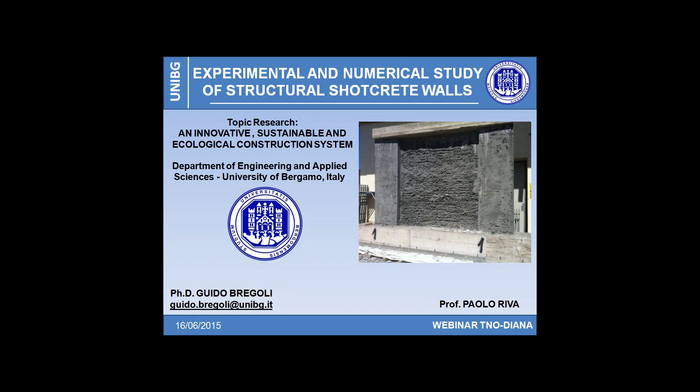The research was born with the aim of developing a simple construction method to realize sustainable residential buildings, especially social housing, and thus suitable for new emergent economies.

The main features we set out to achieve before starting were to realize a system characterized by high acoustic and thermal performance that provides for a considerable reduction, about 30%, in the carbon footprint of the construction system, with respect to a traditional building where the structure is made, for example, of traditional reinforced concrete with infill of hollow bricks.

Our system has to be suitable for different places and thus reliable also in high seismic areas. And finally, a system that could guarantee ease and construction speed and thus economic advantages.

So we have looked for a system that is very versatile and flexible, and adaptable in different contexts, both for social housing but also for buildings with high architectural quality, and as said, reliable for adoption in high seismic areas without any virtual limit to the number of stories.

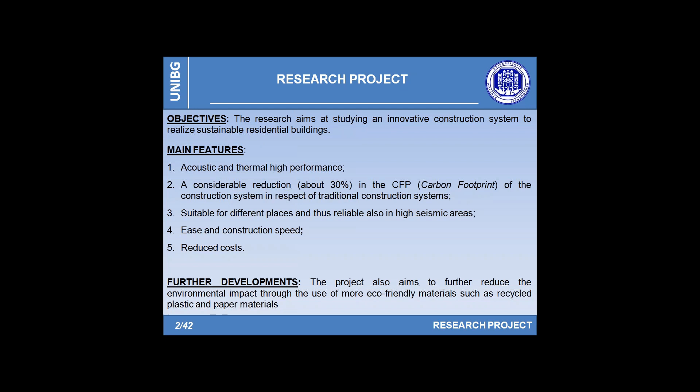The project globally took more than 2 years, and several experts of different scientific areas have been involved to reach these goals. The University of Bergamo, in particular, as a scientific partner, was responsible for studying the seismic structural behavior of the design system.

The University was also responsible for assessing the thermal performance and the energy charge of a typological building, for evaluating the economic and financial aspects, and for investigating the competitive positioning of the technological system in Italy and in developing countries. Along with University of Bergamo, private companies have also been involved.

As industrial partners, they faced 3 specific different topics. The first one was to design and develop the new constructive process, thinking about the structural layout, the wall layer, such as material, geometry, and so on.

Another fundamental topic was the development of a specific mix design to obtain a reliable shotcrete capable of replacing traditional concrete. And the last contribution was to study specific temporary works to optimize the executive process.

In conclusion, experimental analysis to assess the acoustic performance of the external walls and a study of the environmental sustainability by means of a carbon footprint analysis have been conducted.

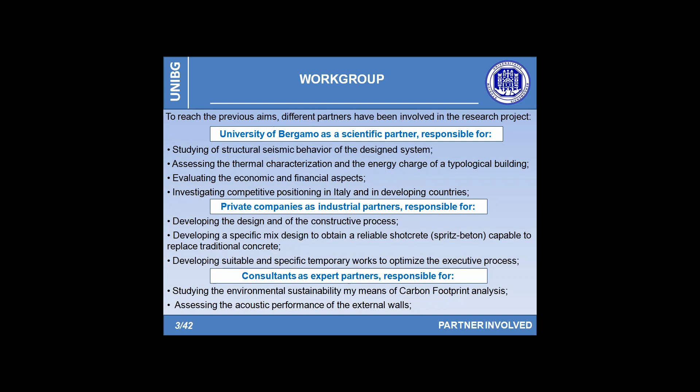Speaking about the presentation, it focuses on the possibility to accurately reproduce with the DIANA FEM code the structural response of a typical structure realized with the proposed system.

The presentation is composed of 4 parts. In the first one, an introduction to the research project is presented, focusing attention on the single module of the external wall. After that, in the second part, I quickly describe the experimental campaign carried out on 3 full-scale specimens.

In the third section, I show the choices and hypotheses assumed for the numerical analysis to reproduce the observed experimental behavior, highlighting the modeling assumptions and the proposed mesh. In conclusion, the numerical results compared with the experimental ones will be discussed.

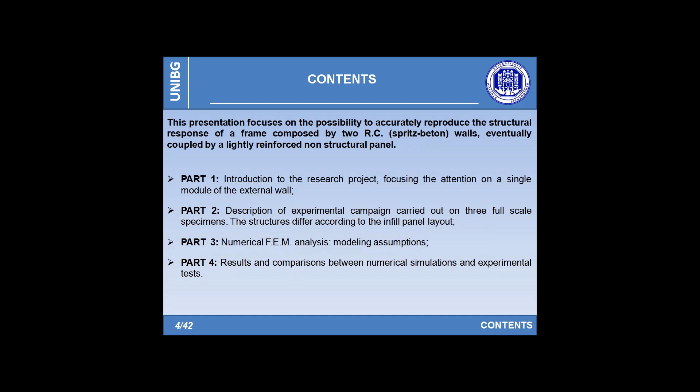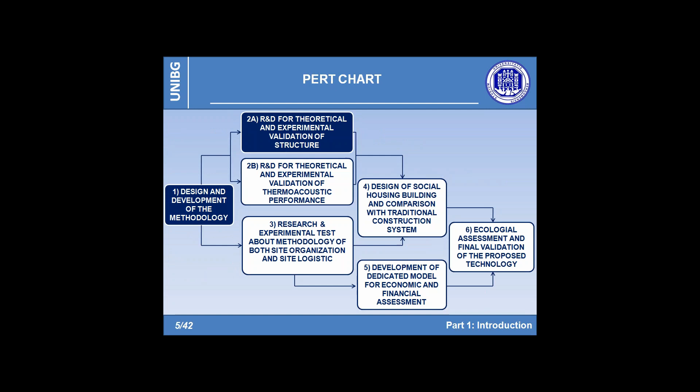In this slide is briefly illustrated the pert chart regarding the conceptual map that governs the work. I will tell you only about the first two boxes. The first one concerns the methodology, the design, while the second one relies on the research and development for the theoretical and experimental validation of the construction system.

As initially reported, the main innovation is related to a new way of using shotcrete. This kind of concrete is widely used in different applications. For example, we are used to seeing it in tunnel linings or for slope stabilization works. Another typical use is as a repair system for local intervention in a damaged structure. But in all these applications, shotcrete is not the main constitutive element for the structure, and it is used only as a layer of small thickness aimed at reinforcing a surface.

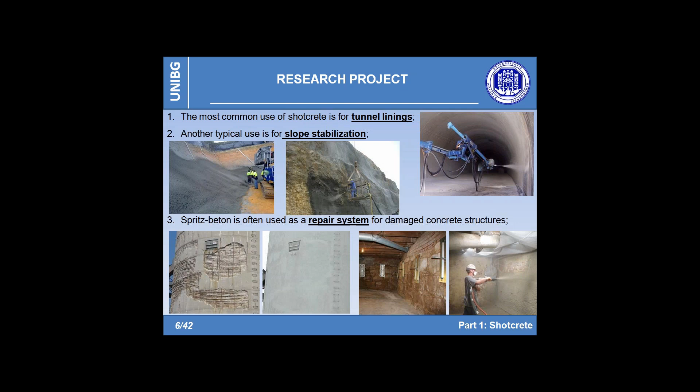Given that shotcrete can be proven to excellently adhere to a support, that it usually shows high mechanical strength, and that it results in a compact and homogeneous material, there are also many different systems that imply the use of shotcrete in structural applications to realize buildings.

It's important to note that in this system it is essential to ensure structural continuity between the individual modules by providing constructive measures such as the insertion of supplementary reinforcement or the overlapping of the wire meshes.

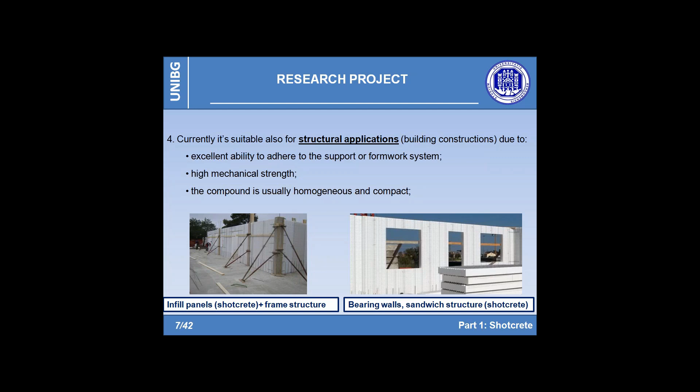In our proposed system, the bearing capacity instead is provided by seismic resistant structural elements made with spritz-beton, essentially small RC walls widely spread on the perimeter of the building. All the infill panels are also made using shotcrete, thus realizing continuous, lightly reinforced non-structural walls connecting the shear walls, which have approximately 4 to 6 meter spacing.

Differently from the previous system, the secondary elements do not fulfill any structural function and could be considered simple infill panels without a load-bearing role. Moreover, the proposed structure, being a traditional structural wall system, can be designed through a traditional approach, not requiring any kind of specific or special certifications.

The use of shear walls coupled with flat two-way reinforced concrete slabs leads to a simple overall structural system, which has the advantage of avoiding the complexity of the design and construction of seismic resistant frames, for example.

The construction phase of each floor starts by positioning the shoring necessary to cast the upper slab system. Then the EPS panels are fixed to the base floor and to the upper shorings through proper devices. The main innovation consists in the layout and composition of the external walls, as you can see in the figure.

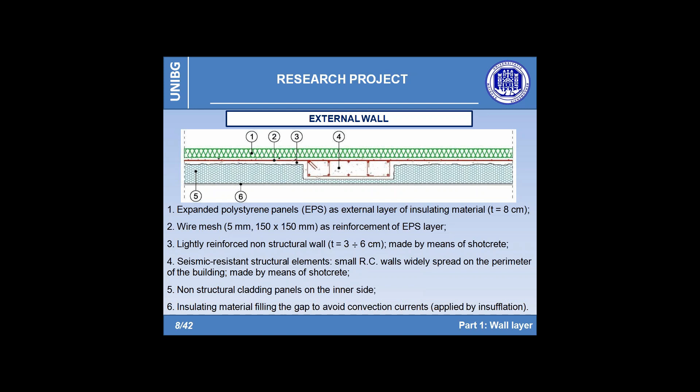After casting the shotcrete for the structural wall, and if applicable for a lightly reinforced non-structural panel, the wall section is finally completed by placing cladding panels on the inner side and filling the inner chamber with proper insulating material, thus improving the thermal and acoustic efficiency of the construction system.

To avoid uncertainties, a wet mix method has been adopted. It provides for the pumping of a pre-mixed cementitious composite, already mixed with water in a storage container before entering the nozzle. In this way, the worker cannot compromise the mechanical characteristics of the final product, not being involved in the control of water addition.

The mixture goes out through the nozzle thanks to compressed air, which permits the shooting onto the EPS panels without any additional operation. This results in a material whose mechanical properties are stable, replicable, and guaranteed.

On the contrary, in the dry mix method, the cementitious mixture is blown through a hose to the nozzle, where the operator should add water. As a result, the nozzleman should be very careful in choosing the right amount of water, avoiding compromising the mechanical characteristics of the final product.

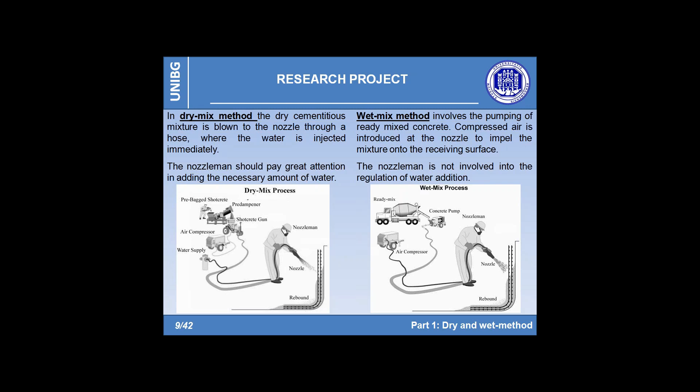In order to cast all of the components without traditional formworks, including the structural walls, while obtaining satisfactory and reliable structural properties for the concrete, a new fiber-reinforced shotcrete material has been developed to guarantee both workability and mechanical resistance, and to allow good cohesion between concrete and vertical supports.

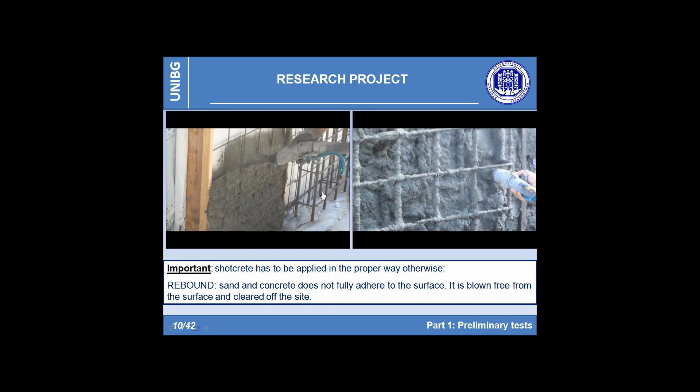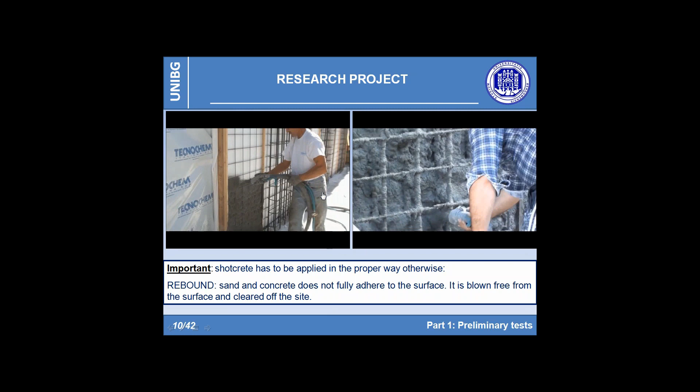In this slide, the shooting phase during the preliminary test is shown. On the left side, one can see the material applied in correspondence with the infill. On the right side, a structural wall is cast. This is only a first attempt, but the preliminary results gave us important information for the continuation of the research.

First of all, the worker has to pay attention to correctly regulate the amount of compressed air flow. Otherwise, the impact forces become too high, and this can result in deflection or vibration of the support, which can also cause rebound and thus wastage of material.

This test, in particular, relies on assessing the feasibility of the process, initially monitoring the capacity of the cementitious compound to adhere to the supports and to show limited rebound.

Considering that in this application the supporting surfaces acting as formworks are not stiff and don't have high inertial masses, they may be subjected to non-negligible vibration. In order to guarantee adequate stiffness, it's very important to correctly choose the thickness of the EPS panels and especially the spacing of the stiffeners used to stabilize them during shotcreting.

In this case, neither delamination between support and shotcrete nor sliding between two consecutive layers of shotcrete occurred. This is due firstly to the mechanical characteristics of the developed cementitious compound, which is homogeneous and sufficiently compact, with very good strength capacity.

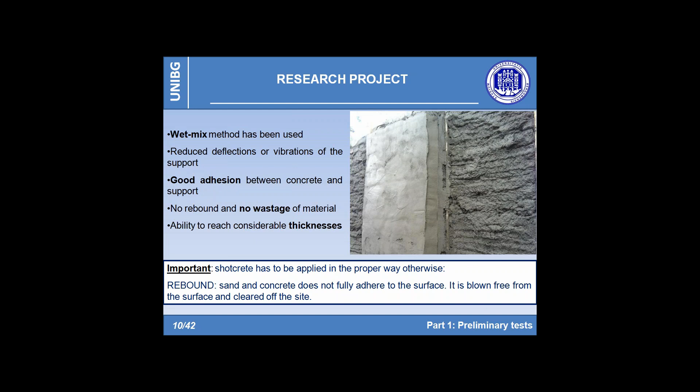Moreover, the success of the preliminary test has also been reached thanks to the efficiency of the selected EPS panels, both in terms of roughness and number of panel stiffeners. All these features have permitted obtaining a considerable thickness, in particular more than 20 centimeters, without wastage of material, permitting progress with the experimental campaign.

After assessing the reliability of different cementitious materials in terms of stability and absence of sliding phenomena, uniaxial compressive tests on several cores extracted from the structural wall have been carried out and a maturation curve has been defined.

Two different types of cementitious material have been tested during the preliminary test. The first one, named Mix 1, appeared to be homogeneous in terms of mass density and reliable in terms of structural response, reaching a mean compressive strength after 28 days of curing equal to 50 megapascals, and especially showing an average strength at 24 hours equal to 25 megapascals, thus ensuring the possibility of erecting the structure with an extremely fast construction process.

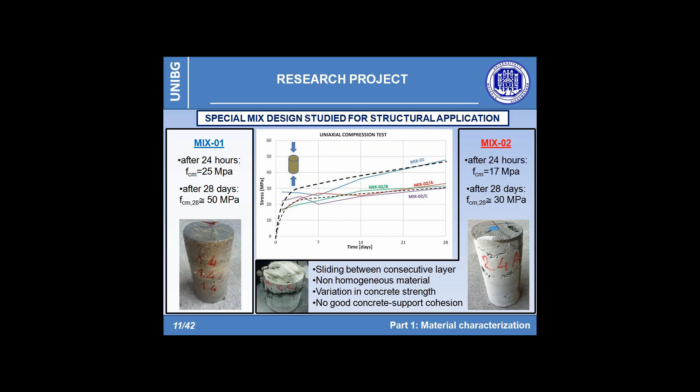Concerning Mix 2, different problems regarding sliding between two consecutive shotcrete layers and detaching from the support suggested modifying the mix during the casting phase by adding different types of plastic fibers. Nevertheless, the test results haven't proven to be up to expectations, thus suggesting adopting Mix 1 to proceed with the experimental campaign.

To evaluate the seismic response of the proposed technology, a typical structural layout was designed with the proposed system, as shown in the upper figures. The plans represent a model story of a 5-story sample building, specifically designed to investigate also the environmental impact in terms of equivalent CO2 and thermal performance. The project also permits deriving a geometrical model representative of the real structure.

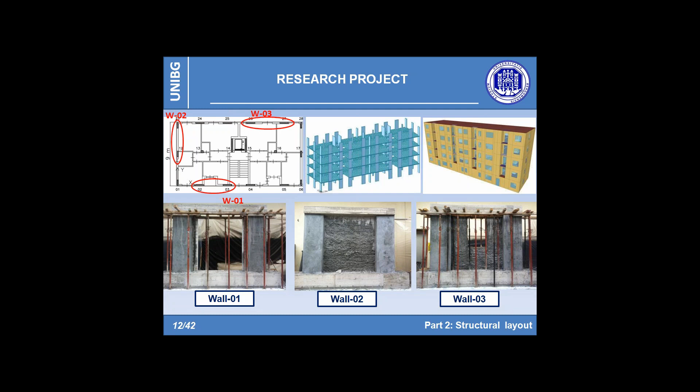In particular, 3 different specimens were taken from the external envelope of the building, as reported in the slide. This is to study the hysteretic response of the designed structure and to investigate the interaction between infill and structural shear walls. The specimens have the same dimensions and differ only in respect to the presence of a light infill panel that can also present an internal window opening, as depicted in the slide.

So each sample was made of an outer frame having an overall dimension equal to 4 by 2.88 meters, composed of 2 external structural walls of equal size, 80 by 20 centimeters, connected at the top by a beam simulating the top floor slab, and at the bottom to a rigid foundation.

The specimens wall 2 and wall 3 differ from the first specimen by the presence of a shotcrete infill panel, having a variable thickness between 3 and 6 centimeters.

The specimen, being a typical portion of the external building envelope, is only constituted by the EPS panels and by the shotcrete layer.

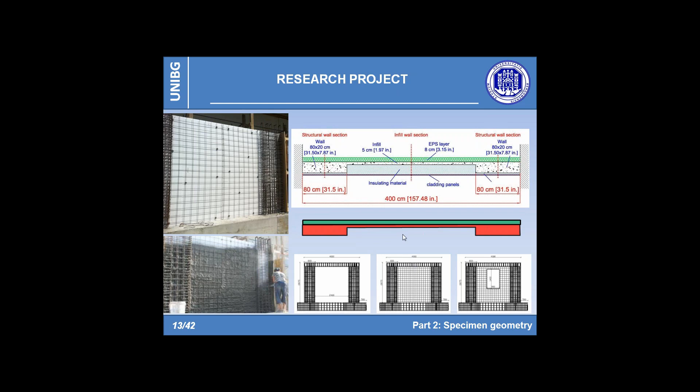So, 3 pseudostatic cyclic tests have been conducted on the previous full-scale specimen. The experimental tests have been performed imposing a displacement to the top beam by means of an electromechanical actuator connected to a rigid wall used as a reaction structure.

To ensure that the wall deforms, avoiding lateral instability or out-of-plane displacements, a retaining system composed of 4 steel struts has been set up to guide the specimen during the load application. Letter C in the image.

The rigid foundation has also been pre-stressed to prevent any possible slip phenomenon, and moreover it has been tied to the reaction floor close to the external sections, exerting a vertical confinement that inhibits its rotation and then its lifting.

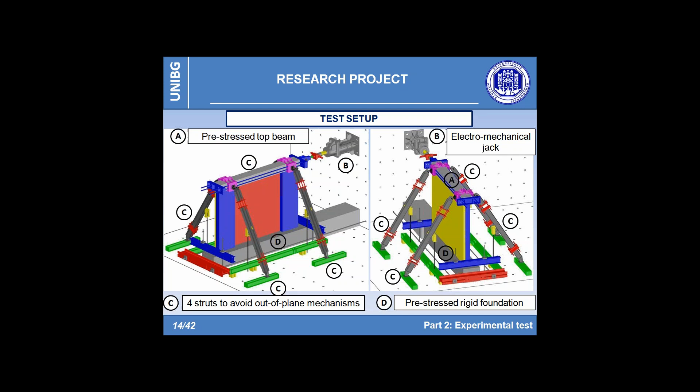All tests have been carried out by applying a cyclic displacement of increasing amplitude to the top beam according to the loading history shown in the table and depicted in the figure.

The first level of the imposed drift, equal to 0.1%, is functional only to verify the elastic stiffness of the structure. After that, the loading history provides the execution of drift levels multiple of 0.25% until reaching the imposed drift coinciding with 1% of the story height.

From this step forward, the amplitude of the cycles is incremented each time by a value equal to 0.5%, up to the collapse of the structure. In particular, for each drift level, 3 complete cycles have been repeated.

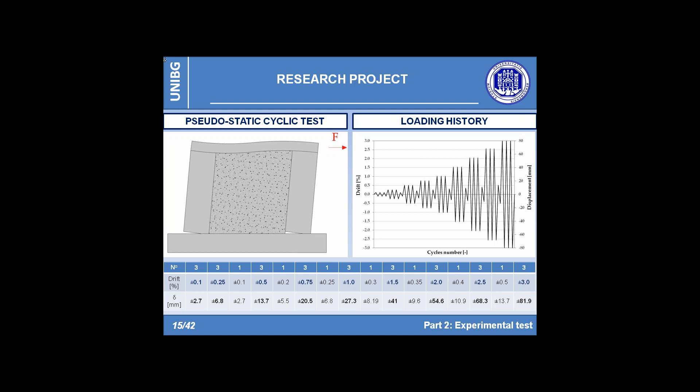As briefly outlined, the adopted protocol has been performed by monitoring the displacement in terms of interstory drift. The horizontal displacement has been registered at the top, in the middle of the upper beam, by the instruments named 2 and 27, while the height of the structure has been assumed as the distance between the point of the applied load, labeled 1 in the picture, and the base of the structural walls, in this case equal to 2.73 meters.

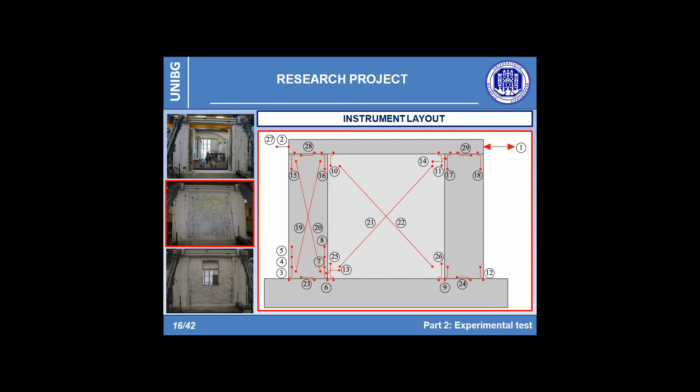The displacement, crack openings, and other kinematic quantities have been recorded during the test by means of a potentiometric transducer, according to the layout shown in the figure. In particular, the devices located at the interface between the shear walls and foundation, and between the structural walls and the upper beam, have permitted monitoring of the respective sliding, giving important information also for the numerical modeling.

In this picture, the last regarding the experimental campaign, the specimen geometry and the reinforcement details are shown. As you can see, the spacing of the bars and of the stirrups is very repetitive, highlighting a regular layout.

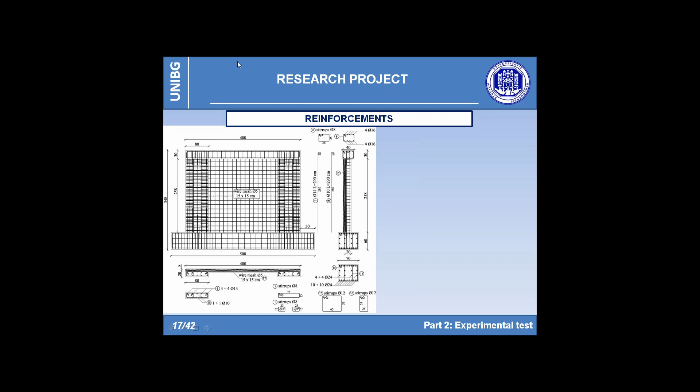In particular, you see here the reinforcement designed for the upper beam, the one related to the structural walls, and the infill panels, armed only with a light 15 centimeter wire mesh with a diameter of 5 millimeters.

Finally, the foundation has been designed to be over-resistant, and for this reason it was strongly armed to behave elastically. It's also important to note that sheets of electrowelded wire mesh are only placed side by side.

In this way, the infill results attached to the remaining structure thanks to the wire mesh that goes on only over the structural walls. This layout has been responsible for the mechanism affecting the infill observed during the test.

In fact, in correspondence with the shrinkage crack developed in the middle of the infill panel, the central panel tends to divide into two halves.

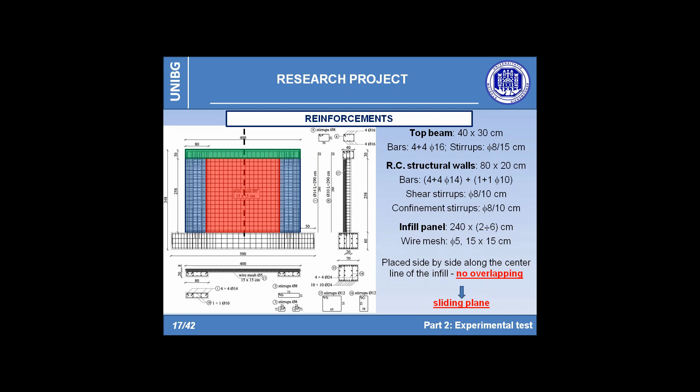The numerical analyses have been validated in terms of capacity curve, such as base shear versus interstory drift or displacement, and by comparing the experimental crack pattern with that obtained numerically, trying to simulate and investigate the interaction between infill and structural shear walls. All the tests have been described with a two-dimensional model using only plane stress elements.

The numerical simulation takes into account only the material nonlinearity by means of a smeared crack approach, while the geometric ones have been neglected. Moreover, for the sake of simplicity, only monotonic pushover analyses have been performed, reducing the computational cost to about 4 to 6 hours.

In this way, the damage accumulation due to the cyclic actions has been ignored. Not having a specific characterization of the material except for the mean compressive strength, the problem has been studied from an engineering point of view, trying to reproduce the main mechanism observed during the test. In this way, it doesn't represent the validation of the specific material mechanical behavior.

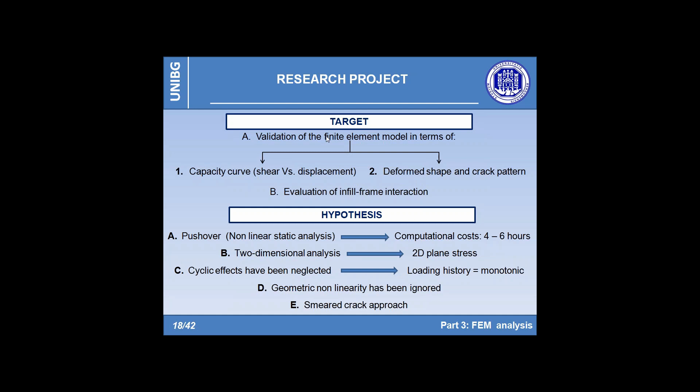The proposed numerical simulations are performed by means of two-dimensional models where all geometrical parts are meshed using 8-node quadrilateral plane stress elements. The mesh is highly structured, regular, with square elements having side equal to 50 millimeters. Only for the last test, Wall 3, in order to smooth the edges of the window, 6-node triangular plane stress elements have been used, placed at the corners of the window to avoid numerical problems due to high stress localization.

Moreover, trying to reproduce the interaction between the parts making up the specimen, interface elements having zero thickness have been adopted.

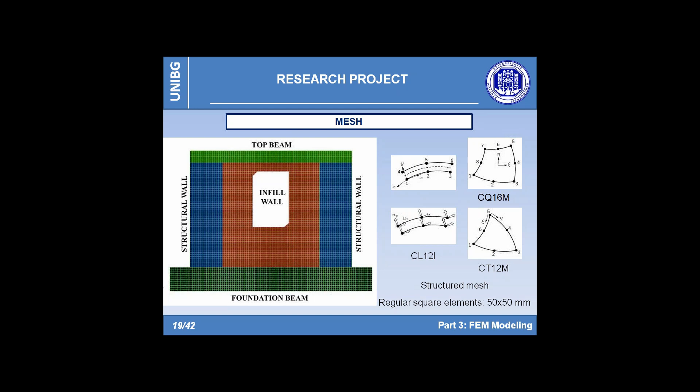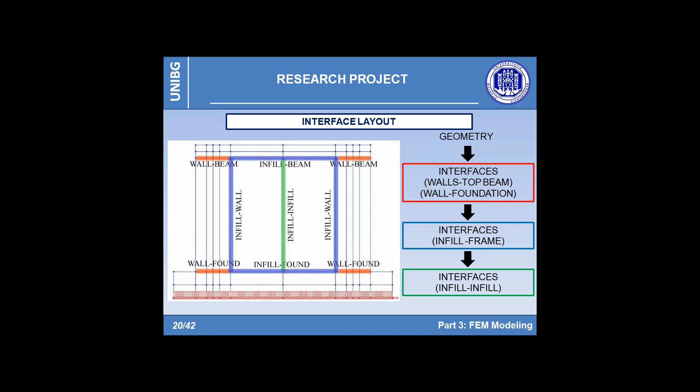Regarding the modeling of the reinforcement, as previously briefly described, all the horizontal and vertical steel elements having a regular spacing have been modeled as reinforcement grids. Thus, the reinforcement has been modeled as fully embedded in the concrete elements, implying a perfect bond between the reinforcement and the surrounding material.

Firstly, it's necessary to define the area of the mother elements, and in particular the following zones have been detected: the beam reinforcement, the foundation reinforcement, the area related to the longitudinal bars of the confined zone inside the structural walls, and in the same way the one connected to the stirrups.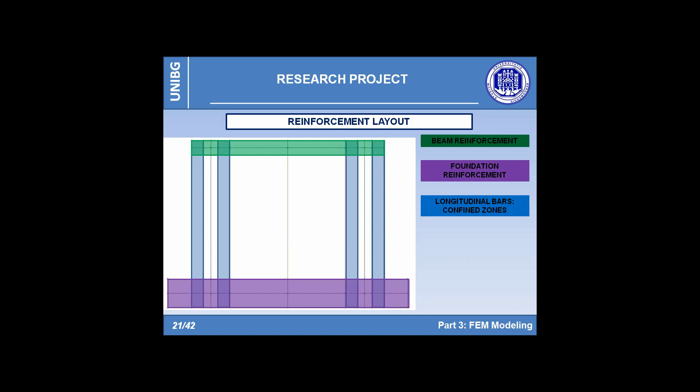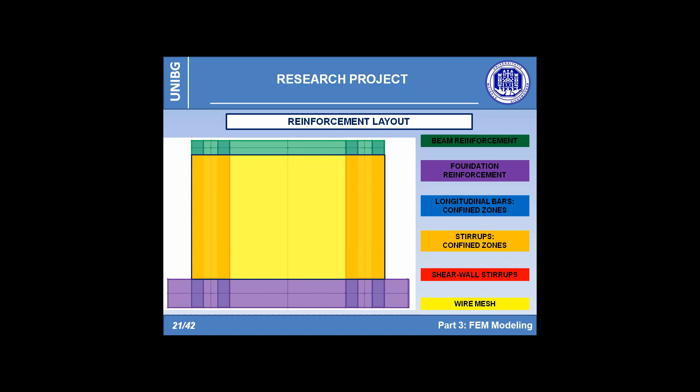After that, the areas for the shear-wall stirrups and for the wire mesh have been created. Secondly, for each of the latter areas, an equivalent thickness for both global directions has been defined.

Only as an example, to calibrate the geometrical property of the wire mesh, it's only necessary to divide the area of the bar cross-section by the wire mesh spacing.

So, being 20 square millimeters the area of the cross-section of a single bar and 150 millimeters the wire mesh spacing, the equivalent thickness results identical in X and Y direction and equal to 0.131 millimeters.

In the same way, knowing the percentage of longitudinal reinforcement, it's enough to multiply the latter by the host element thickness. For example, being 1.64% the reinforcement percentage of the confinement zone, the Y equivalent thickness results equal to 2.463 millimeters. So, following this example, the X and Y equivalent thickness have been calculated for all the previous areas.

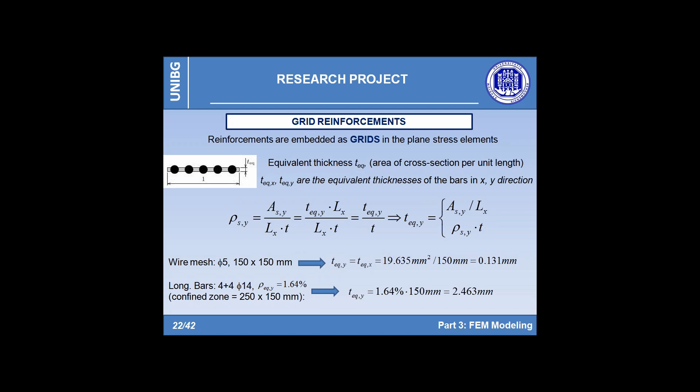In this slide, the different materials implemented in the model are presented. In particular, 3 distinct types of concrete have been defined: the traditional concrete used in the top beam, the shotcrete used in the structural walls and in the infill, and finally the ordinary concrete used in the foundation.

In particular, acting as a rigid base, the foundation has been modeled as an elastic element, ignoring material nonlinearities.

Nonlinear property in tension using a total strain rotating crack model has been defined both for the sprayed concrete and for the top beam concrete, on the basis of the linear softening tension stress-strain relation, for which it is necessary to specify only the ultimate tensile strength and strain.

Regarding the compressive behavior for the fiber-reinforced sprayed concrete, the parabolic diagram stress-strain model was used. In this case, the data input corresponds to the ultimate stress and to the compressive fracture energy.

To describe the compressive behavior of the ordinary concrete, instead, the Thorenfeldt model has been chosen, defining only the maximum compression stress.

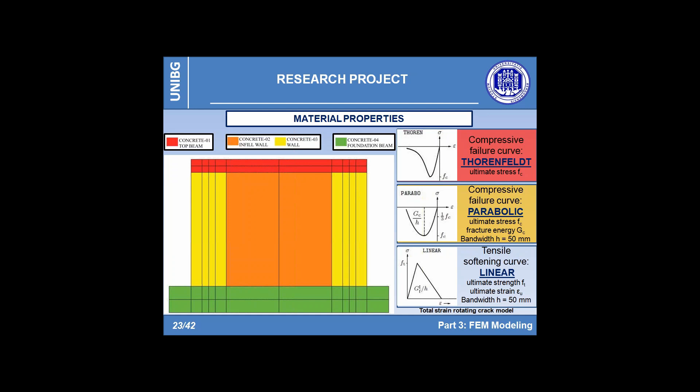Finally, given the fact that the infill panel isn't homogeneous in thickness and density, the related material has been modeled, strongly decreasing the mechanical property of the structural wall shotcrete, as shown in the next slide.

Both for the traditional concrete used for the top beam and for the shotcrete, a Young's modulus equal to 20,000 megapascal has been adopted. Even if this value is lower with respect to the one suggested by the code for high-strength concrete as the present shotcrete, it is worth remembering that, being shot and not cast, the actual cementitious material can be treated more as traditional concrete, given that the voids occurring during the shooting phase can also affect its stiffness.

For the same reason, the ultimate tensile strength and strain have been hypothesized to obtain a tensile fracture energy more similar to that of traditional plain concrete.

Moreover, concerning the behavior in compression, the value of the fracture energy is very difficult to calibrate, affecting in a very strong way the ductility capacity offered by the structure. Despite that, it results that values between 10 and 50 kilojoules per square meter can be suitable to describe the experimental results.

Regarding the ultimate compressive strength, the values listed in the table are coherent with uniaxial compression tests performed on all the above materials, resulting in an average ultimate strength respectively equal to 50 megapascal for shotcrete, 15 megapascal for the top beam, and 30 megapascal for the foundation.

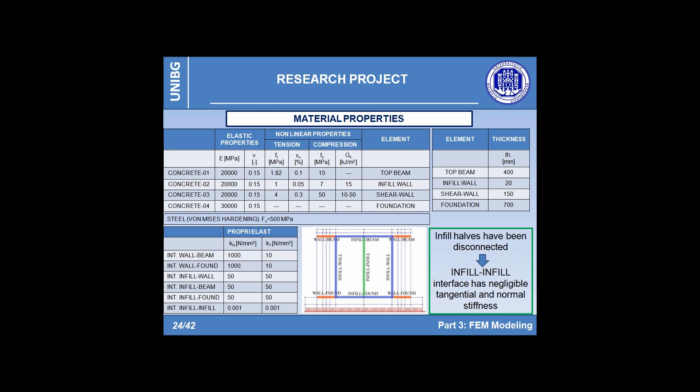This is the last slide regarding the finite element model, showing the applied load and the boundary conditions. All the simulations have been performed applying a displacement of 1 millimeter amplitude to the center point of the top beam. Then a pushover analysis up to 60 steps has been carried out using both displacement and force control, with a tolerance of 1% for both parameters.

To properly simulate the load condition, the displacement has been applied at the top, connecting through a rigid link all the nodes belonging to the horizontal axis of the upper beam. This solution constrains only the horizontal global displacement along the x-axis, causing the top beam to move rigidly and allowing for a better distribution of the external load, thus avoiding a possible numerical problem due to the localization of high stresses in only a few nodes.

Finally, regarding the boundary condition, the nodes belonging to the baseline of the foundation are simply constrained by means of hinges that inhibit both horizontal and vertical displacement, coherently with the experimental setup.

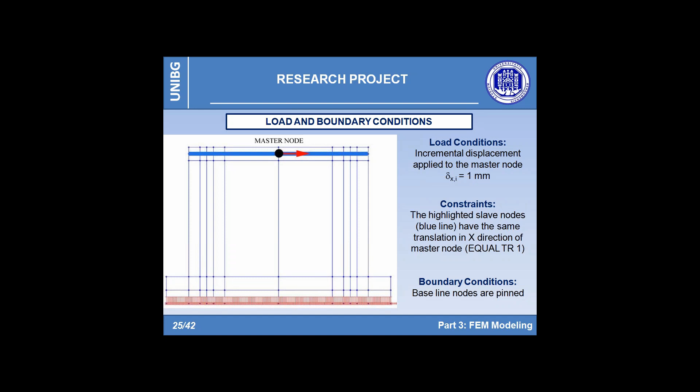For each of the three tests, the comparison in terms of load-displacement curves is presented, and in particular, in the next slide, the black line reports the envelope curve derived from the experimental cyclic loading. As previously said, the numerical simulation is only monotonic, so in red is the capacity curve, equal for both directions given the symmetry of the specimen.

These figures show first how for wall 1 the numerical result exhibits a good match in terms of elastic stiffness. The model seems to be also able to correctly catch the peak load, in particular 282 kN and 264 kN for the experimental test and 279 for the numerical one.

The main differences are recorded in respect to the negative direction, but this evidence is only due to the cyclic effects. In effect, as you can see for each step of displacement, the experimental forces in positive direction are higher than the equivalent in the opposite side. This behavior is consistent with the Bauschinger effect that implies a reduction of the yield strength, inverting the verse of the imposed displacement.

Regarding the softening branch, after the peak load, a key role is played by the parameter of the compressive fracture energy that affects the ductility level provided by the structure. In this case, a value of 50 kJ per square meter has proven to be reliable.

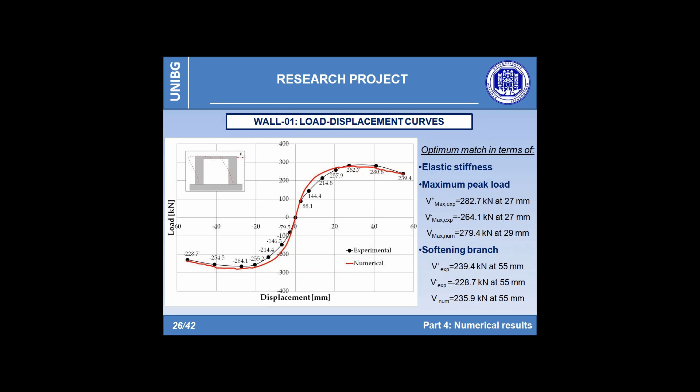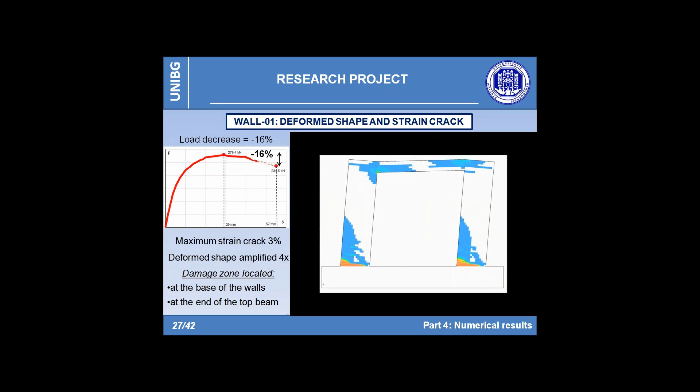The crack pattern observed for wall 1 is highly symmetric, with ample cracking zones which affect the bases of both structural walls, and with the formation of plastic hinges at the ends of the top beam. In this way, once the structure reaches its ultimate bearing capacity, it can be noted that the top beam is able to guarantee a coupling action between the walls.

From this figure, you can see as the numerical simulation is able to describe the main structural mechanism, highlighting with good reliability the cracks that affect the structural walls at their base and that have been also responsible of the structural collapse occurred at 2.5% drift.

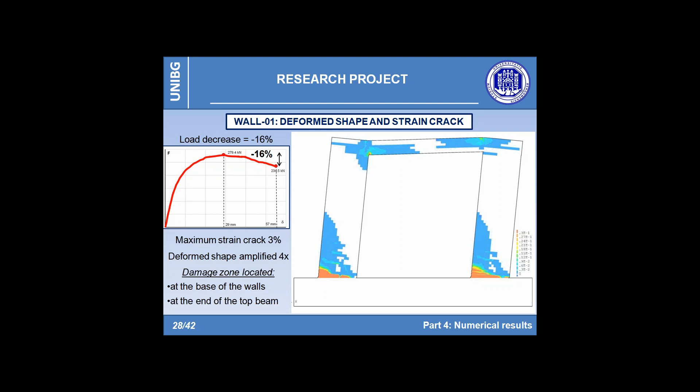Trying to compare the crack layout observed during the test with that provided by the numerical analysis, in this slide the cracks appear during the application of the load only in positive direction, and in negative direction have been distinguished.

In particular, in the left image, the load is applied in positive direction, from right to left, as also deducible watching the orientation and localization of the cracks. On the contrary, the picture on the right side shows what has happened during the application of the displacement in the negative direction. The picture highlights the superimposition between the experimental crack, black lines, and the cracked area caught numerically.

As you can see, the model has proven to be reliable in reproducing the experimental behavior, also catching the inclination and evolution of the cracks. Both at the base and in correspondence of the upper beam, the crack zones caught numerically are a little underestimated, probably due to the cyclic effect that increases the damage level at each step and that here are not taken into account.

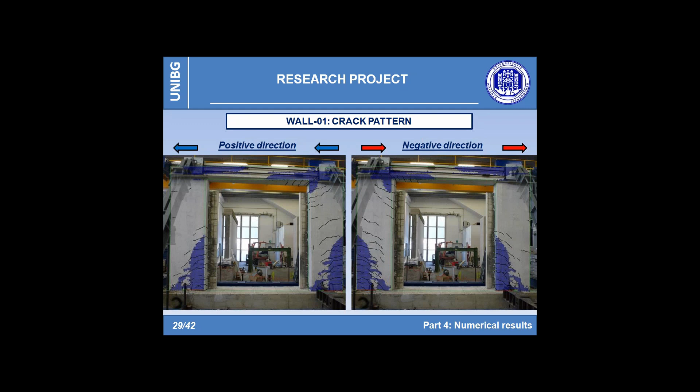The present slide, where details of the main cracks observed during the test are shown, confirms how the finite element model is able to reproduce the actual damage. In particular, in the figure, you can see the detachment at the interface between shear walls and the foundation, and also the flexural cracks at the base that have been responsible of the collapse of the structure.

Both the shear walls have experimented a similar damage pattern that involves about half of the height of the wall, as shown in image A and B. Finally, observing the lower side of the beam, it is possible to recognize the horizontal cracks that signal the formation of a plastic hinge at the end of the top beam, as seen later in the figure.

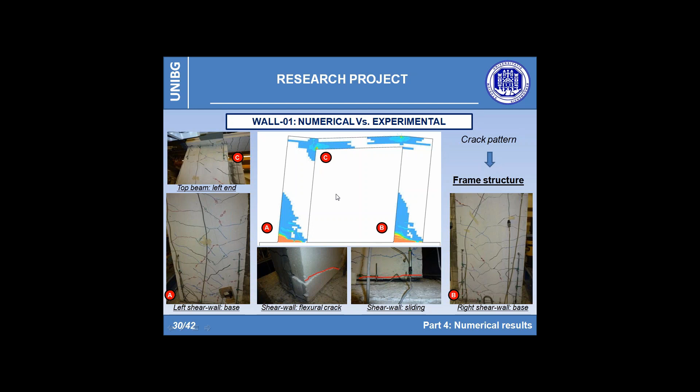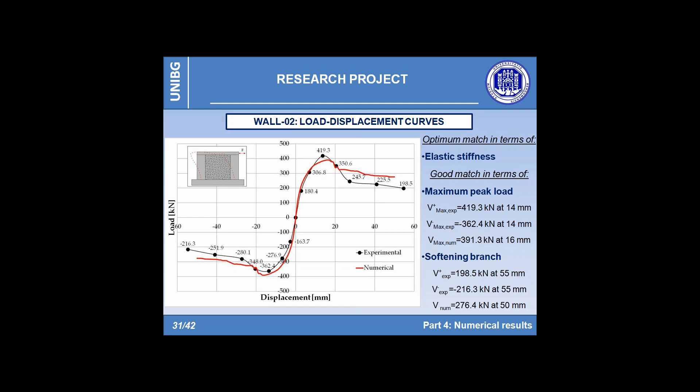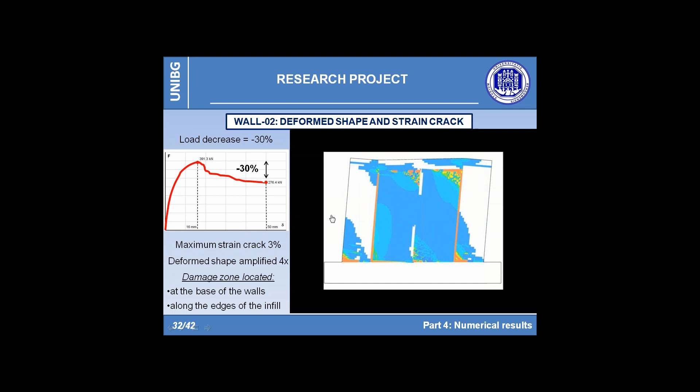As previously done, the video of the deformed shape evolution with increasing applied displacement is reported, highlighting the zone affected by cracks. It can be noted how the infill panel tends to quickly exhaust its structural resources, highlighting, starting from 0.5% drift, widespread damage and significant cracks at the interface with the structural walls and along the edges with the outer frame.

Observing the figure, it can be seen how at the base the cracked area is extending in height due to the presence of an inclined strut that develops within the infill.

Regarding the outer frame, a crack pattern non dissimilar from the previous one can be recognized, except for the damage zone affecting the right shear wall due to the contribution of the compressive struts.

The infill panel presents a crack pattern that appears similar between the two halves. This is due to the presence of the elastic interface with no stiffness model along the center line, which permits the two substructures to behave as independent parts.

Moreover, it can be seen how once the central panel becomes inactive, most of the externally imposed loading action affects only the structures composing the frame.

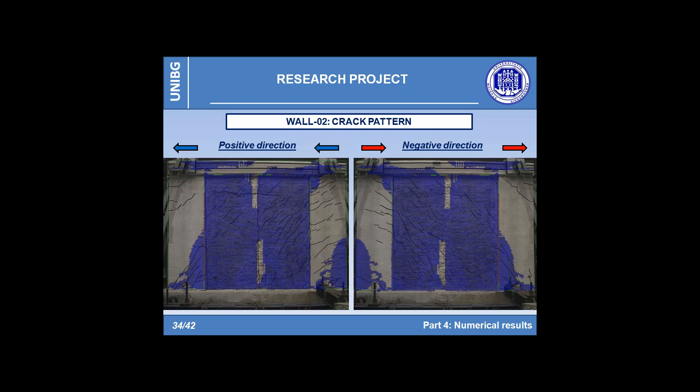Also in this case, the extension of the damage zone numerically is underestimated, but the result can be considered quite satisfactory, given the difficulty to properly describe the interaction between the outer frame and the infill.

Sorry Guido, it seems there is a connection problem. Your voice is not really clear. Just to make sure that there is nothing over there affecting your presentation. Thank you, I'm sorry, okay, I'll try to be closer to the laptop. Thank you, okay.

Yes, also in this case, the finite element model has proven to be able to catch the main mechanism observed during the test, especially correctly assessing the contribution in terms of bearing capacity offered by the infill.

The choice to model the initial shrinkage crack as a plane of weakness revealed to be efficient in reproducing the interaction between infill and structure.

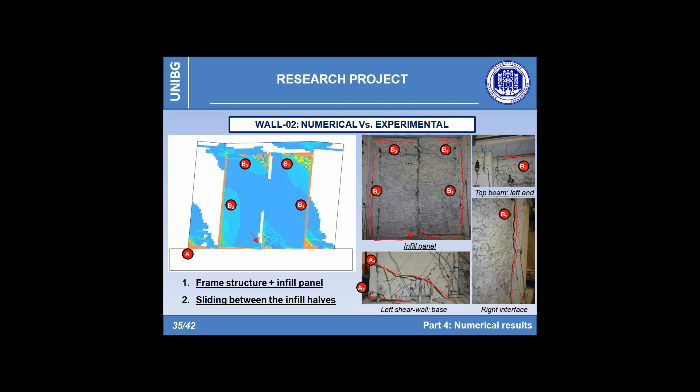Finally, the last comparison in terms of load displacement curve is presented concerning wall 3. The numerical predictions are in substantial agreement with the experimental evidence, both in terms of initial stiffness and peak load.

The maximum force obtained for 0.65% drift is equal to 371 kN, respectively 2.3% and 13.5% higher than the experimental values, registered as usual at 0.5% drift.

The trend of the softening branch is representative of the real structural behavior. However, it's interesting to note that the slopes of the two degrading post-peak branches tend to slightly diverge.

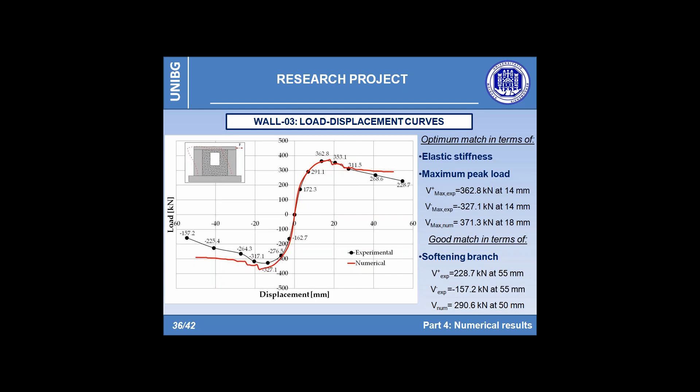The reason for this trend may be related to the greater damage suffered by the structural walls due to the stiffening effect exerted by the infill portion coinciding with the spandrel under the window. This configuration tends to reduce the slenderness of the walls and thereby induces high shear stresses.

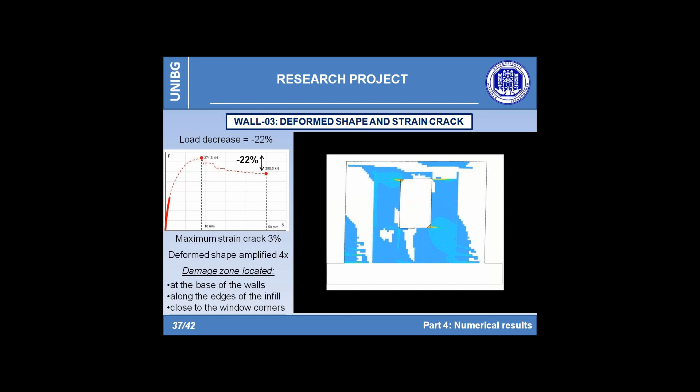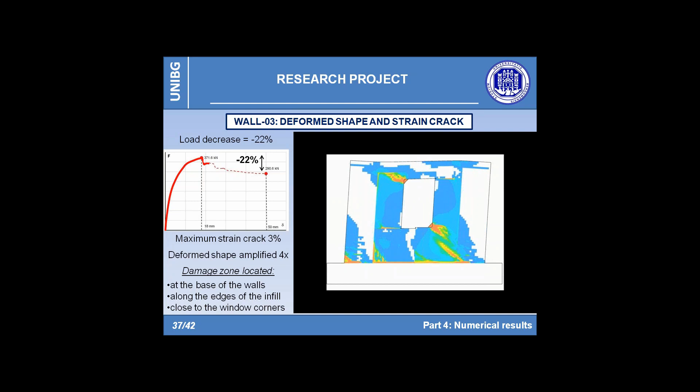Coherently with what was done for the previous test, the evolution of the damage zone in terms of crack strain is reported, being in red the areas affected by strain higher than 3%. The deformation shape in this case is also amplified four times.

The crack evolution reveals that from 0.65% drift, the infill panel is entirely damaged, and that the layout of the cracks appears stable and uniquely defined.

The numerical model revealed to be extremely accurate, turning out to be able to capture both the sliding mechanism that occurs between the two infill halves and the main damage. As also reported in the figure, the widest cracks develop from the corners of the window along the construction joints and between the infill and the walls.

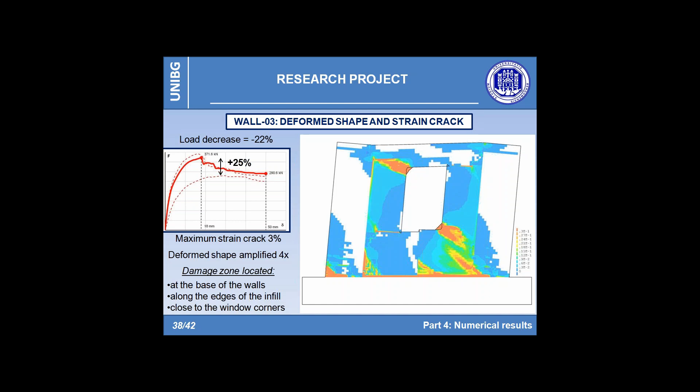Contextually, the outer frame presents a crack pattern very similar to the one related to the first two walls. The result of a superimposition between numerical prediction and experimental cracks, in the hypothesis of a monotonic action, confirms the potentiality of the proposed model to describe the main mechanism, highlighting at the same time the drawbacks previously mentioned.

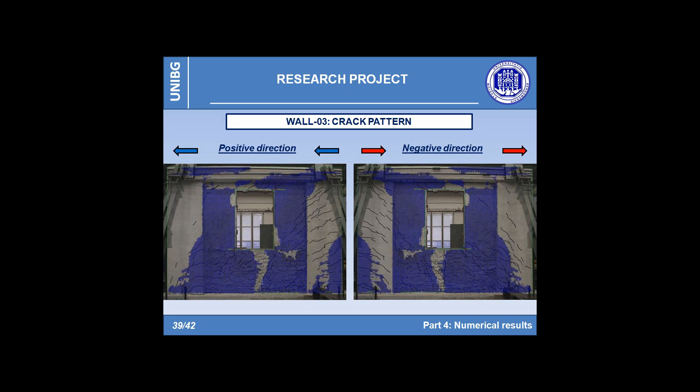Also in this case, the shear walls are affected by more extensive damage compared to what's recalled by the finite element analysis. With respect to wall 2, the shear walls seem to be affected by cracks along their entire height, confirming that the presence of the inferior spandrel slightly affects the crack pattern of the structural walls due to high shear stress, as in a short column effect.

Despite it, the last slide shows without any doubt the efficiency of the proposed modeling, comparing the distribution of the cracks, of the strain crack, with an image of how wall 3 looks at the end of the test. The similarities are very interesting.

First, with letter A, we can recognize the cracks starting at the base of the shear wall close to the foundation. In the same way, letter B highlights the damage involving the right wall, where the cracks appear to be less pronounced, probably due to the action exerted by the compressive strut.

As usual, close to the opposite corner of the window, letters C and D, important damage areas can be recognized, also clearly highlighted in the experimental view. Finally, also in this case, the sliding movement between the infill halves is correctly modeled, as shown in the upper image, where a detail of the window is reported.

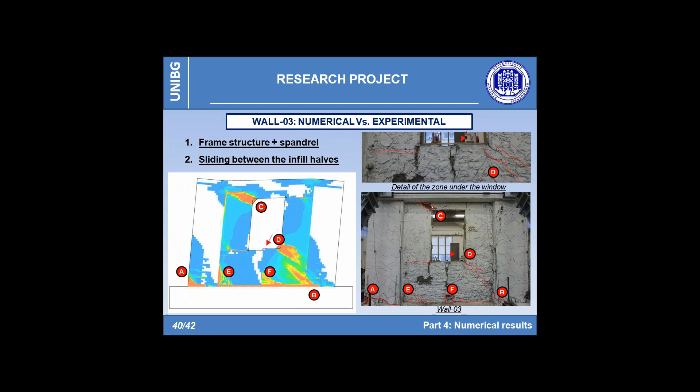The experimental results have shown that the presence of an infill element affects the structural behavior only for low drift levels. With the increase of the imposed displacement, the hysteretic behavior tends to degrade toward a stable scheme made only of shear walls, and thus not vulnerable to brittle collapse such as soft story, and capable to exhibit ductility levels compatible with those suggested by the current seismic codes.

In fact, a behavior factor equal to 3 can be assumed in accordance with the guidelines provided by the Italian code for structures with uncoupled shear walls.

Concerning the behavior at the damage limit state, it is also interesting to note that for cycles at 0.5% drift, no significant cracks on infill panels have been observed. Up to 0.5% drift including, the story shear values have always been increasing, and the first relevant structural damage affecting the infill has been recorded only during the cycles at 1% drift.

Even at the ultimate limit state, the infill panels do not seem to have suffered deformation such as to cause their collapse. The welded wire mesh, despite not being superimposed in the central part of the infills, has been able to retain the connection between the main structural elements and the concrete infill slab, preserving it from expulsion.